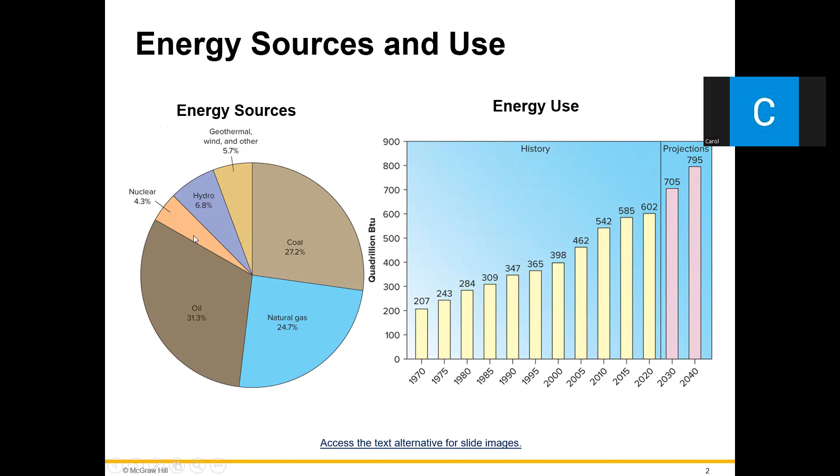So here are some graphs. This one on the right shows our energy usage, which just keeps increasing. And these are projections for years 2030 and 2040, so we don't exactly think we're going to stop needing energy. This is where we get our energy from currently, so it's still mostly hydrocarbons, all of this is hydrocarbons. And then this little, not quite quarter of the pie chart is nuclear, hydro, geothermal, wind, and other.

So what is nuclear power? It is fission, the splitting of an atomic nucleus into smaller fragments. When that happens, it releases energy, and it's like a chain reaction. When this fissions, it releases particles and energy, and becomes a smaller nucleus, and then this neutron comes out and hits another uranium-235, and so forth. So once you do the first one, as long as you have all these other atoms lined up, it's a chain reaction.

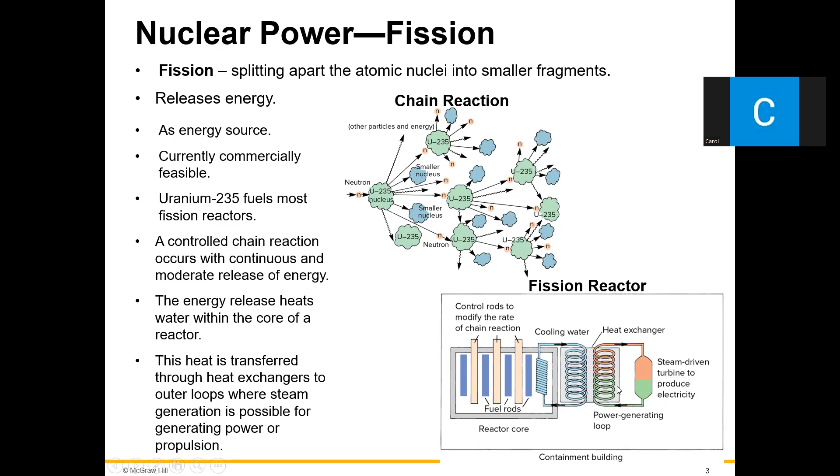So this release of energy heats water, which can be turned into steam, generates steam, and you get a turbine. I don't really know all that much about this, this is more engineering.

Uranium deposits are usually found in sedimentary rocks, or metasedimentary rocks, which are metamorphic rocks that were sedimentary rocks. It's not because it's forming there or precipitating out, it's kind of like those placer deposits with gold. It weathers from other rocks and concentrates in sedimentary rocks through the weathering and depositional process. Minor amounts of uranium are present in many crustal rocks, but granitic and carbonate rocks seem to be rich in uranium. Carbonate is another sedimentary rock, but granite is not, so that would be where it's weathering from.

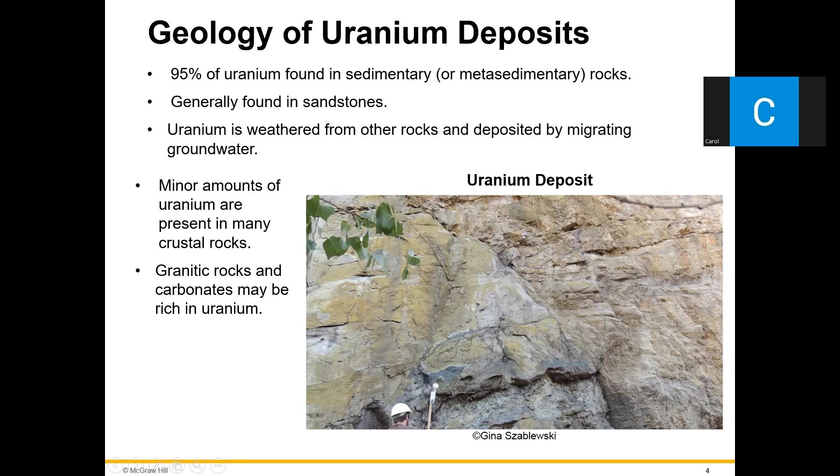Extending the nuclear fuel supply: uranium-235 isn't the only reactive atom we can use. Most of the uranium out there on the planet is actually uranium-238. It's not as common to hear about because it is expensive and complex, but it's pretty cool because it is a breeder reactor material in which, when it fissions, it converts to plutonium. So it decays, uranium-238 decays to plutonium-239, and plutonium-239 is also fissionable. So instead of just using uranium once, like with 235, you can use it twice, using both the parent and the daughter material.

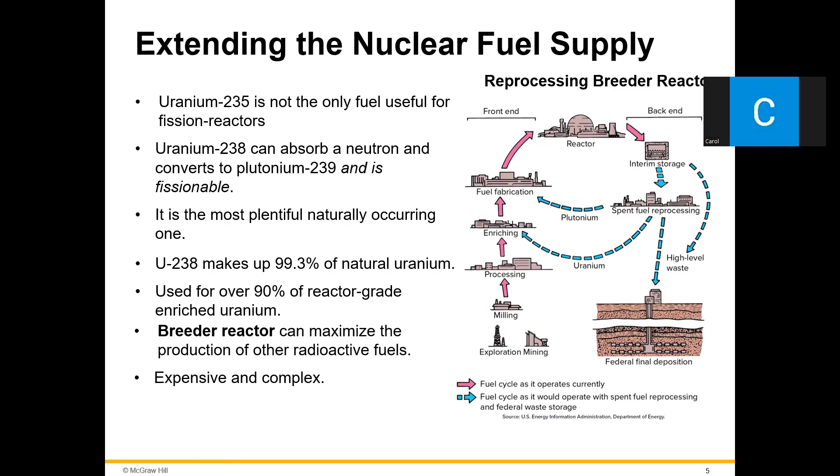It's very common, 99.3% of natural uranium is uranium-238, and it's used for over 90% of reactor-grade enriched uranium. They have to enrich this. I don't really know all that much about it; your textbook goes into more detail on that if you're curious.

Concerns related to nuclear reactor safety: obviously, you don't want to be around it if it explodes, nobody wants a lot of radiation hitting them. However, a lot of people get paranoid for no reason, accidents don't happen all that much. Without an accident, only very minor amounts of radiation are released from these plants. However, you can have a core meltdown if it becomes too hot because you lose your coolant. A reactor accident resulting from loss of core coolant and subsequent overheating creates an unmanageable mass that can migrate out of the containment structure. This could result in a catastrophic release of radiation into the environment.

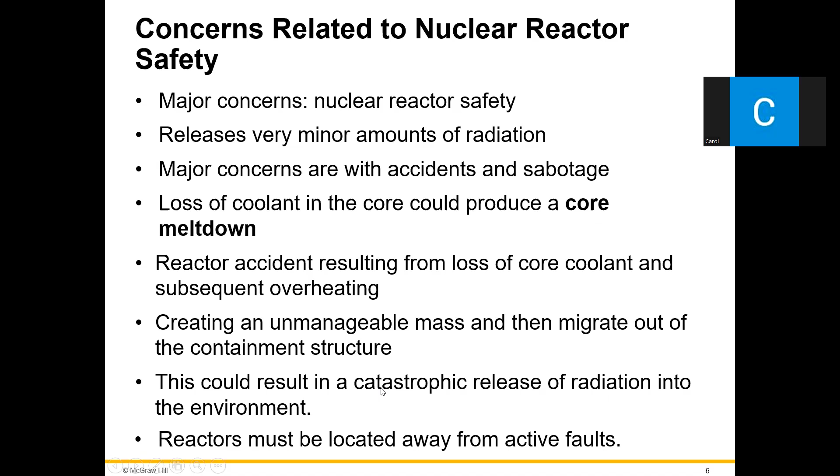Reactors must be located away from active faults because you don't want it to just break. These catastrophic events, like Chernobyl, nobody wants that.

The textbook mentioned that when they try to put in a nuclear power plant, people protest it because nobody wants it. Everybody wants nuclear energy, but nobody wants to live next to it. So it's very difficult. Nobody wants to be exposed.

Miners, except for a meltdown, are more exposed than anybody else because they're mining out these radioactive rocks. Then there's the tailings as well, these piles we talked about in the mining chapter, but they can weather and mobilize and get into the water, just like anything else.

Use of breeder reactors to produce and recover plutonium to extend the supply of fissionable fuel poses special problems. As we've seen in world events, that can be used to make nuclear weapons too.

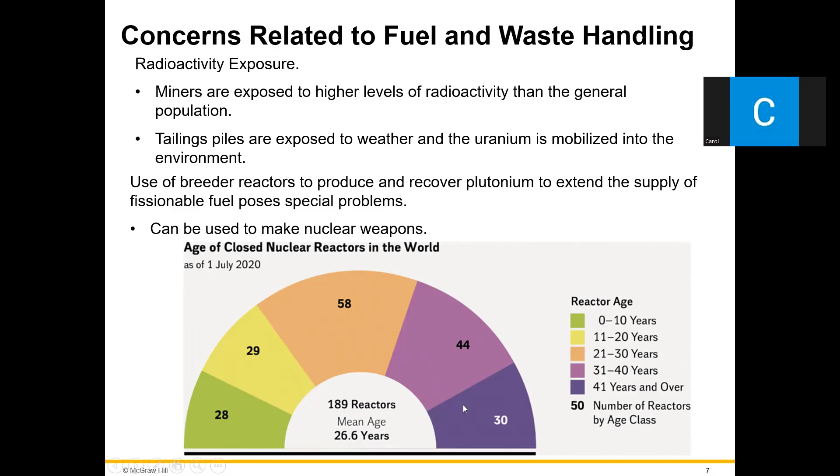What is this? This is the age of nuclear reactors in the world. The mean age is 26 years. Purple is over 41 years, so not very many make it to 40.

Radioactive waste: energy produced by nuclear fission produces radioactive wastes, which are difficult to treat, and we currently don't have a long-term permanent storage or disposal site in this country. We talked about that in our waste chapter.

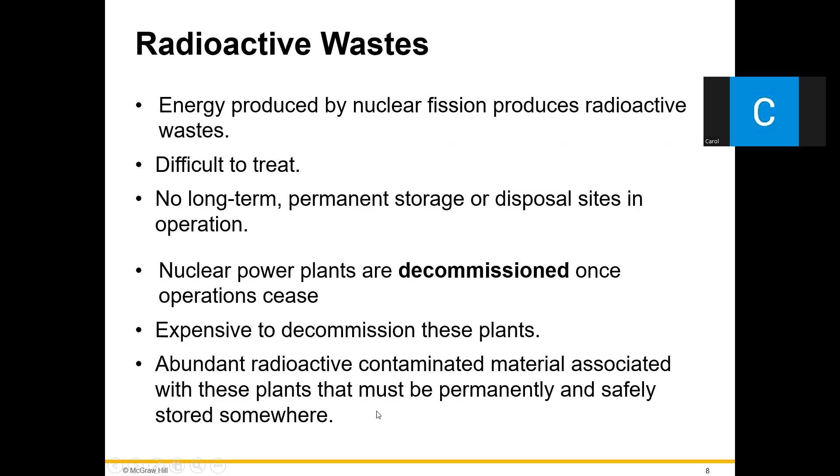Nuclear power plants are decommissioned once operations cease, and that is expensive to decommission. Abundant radioactive contaminated material associated with these plants must be permanently and safely stored somewhere, which requires the space, the concrete, and everything to store those.

Risk assessment and risk perception: no energy source is risk-free. 8% of U.S. energy is supplied by nuclear power in 2021. Nuclear power plants have lower fuel and operating costs than coal-fired plants. The reliance on nuclear power varies a lot globally, anywhere from 2% in some countries to over 30% in others.

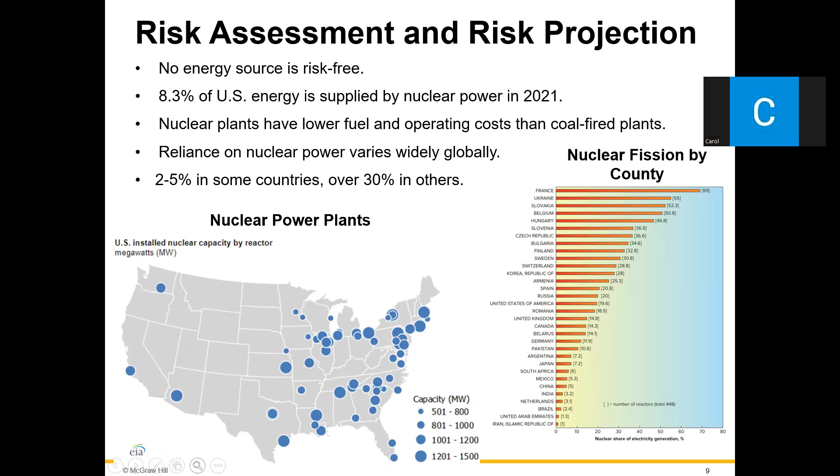This one here is just showing nuclear power plants and how much they are generating in megawatts. None in Kentucky, very few out west. I don't really know why that is. I suspect maybe it's because a lot of water is needed to cool these plants. More watts on the East Coast.

Then there's also fusion, which is a cool idea, but we can't do it. It's going to be expensive, and we don't even have the ability to do it. This is what happens in the sun: instead of splitting an atom, it's combining smaller nuclei to form larger ones, like what the sun does with hydrogen to make helium and stuff. As you can imagine, it would be very efficient and create a lot of energy, but we can't just build a sun on Earth, is how I think of it. Nuclear engineers would probably laugh at how I'm talking about this, but it's still very much just a theory. Maybe one day we'll figure out how to harness this potential.

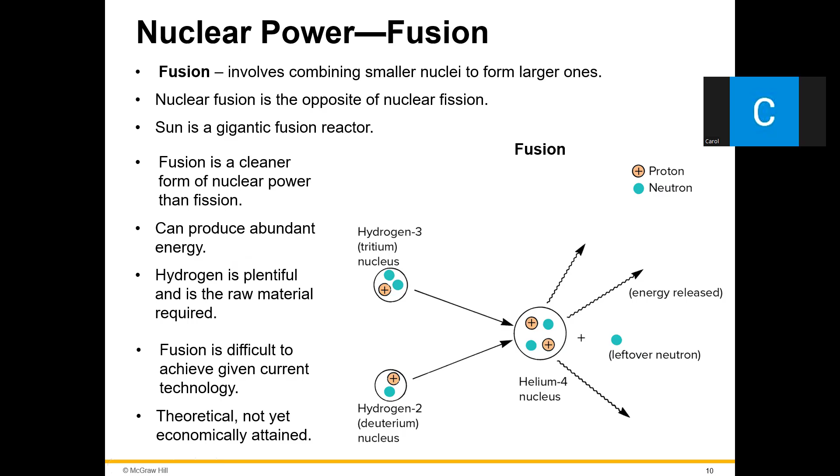And then we will be moving on to solar.